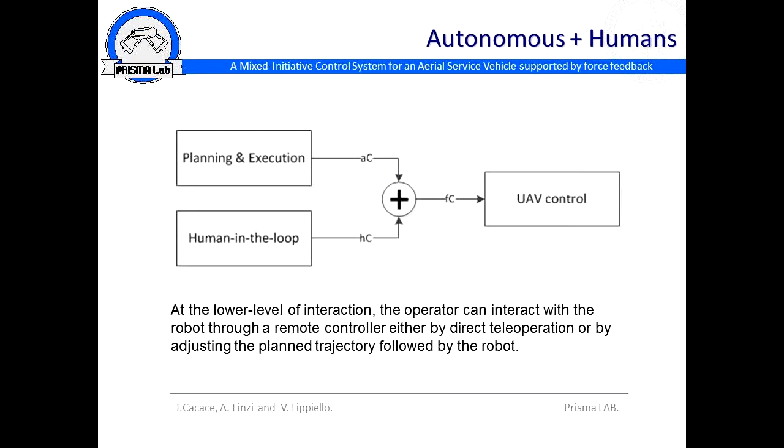The user interacts both with high-level control modules, such as task and path planning, and directly with the teleoperation module. In the first case, the user requires autonomous execution of robotic tasks. In the second, he can modify the planned trajectory during its execution.

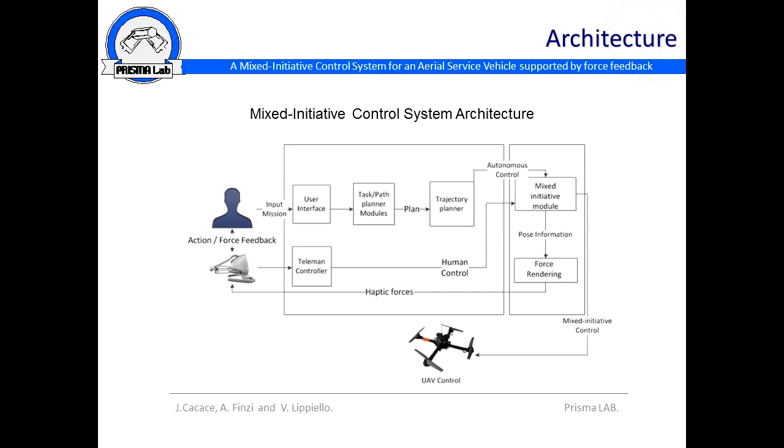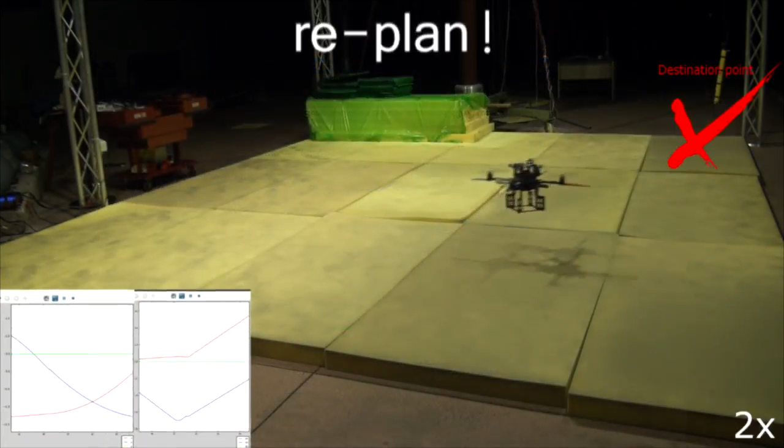With the use of the remote controller, planned trajectories can be directly modified by human interventions. The trajectory planner can be continuously invoked to adjust the current trajectory. For this reason, every trajectory is generated exploiting a fourth-order spline concatenation method that preserves continuous acceleration and allows trajectory switching without halting the robot.

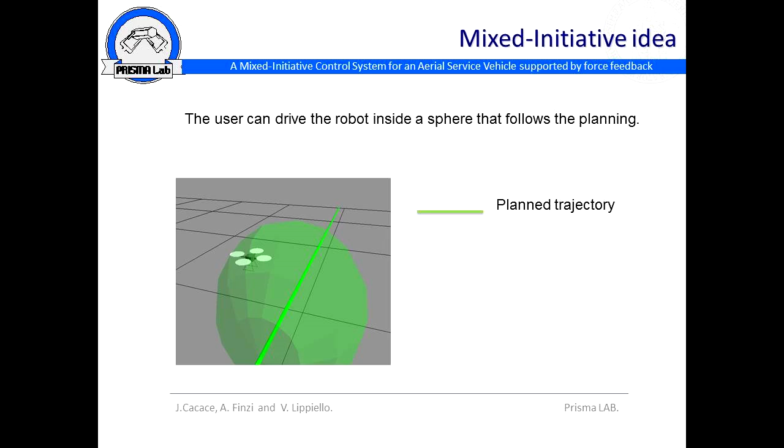The user can drive the robot inside a sphere that follows the planning, known as the teleoperation space. If the user drives the robot out of this sphere, the autonomous system generates another path and trajectory to overcome all waypoints planned in the previous planning.

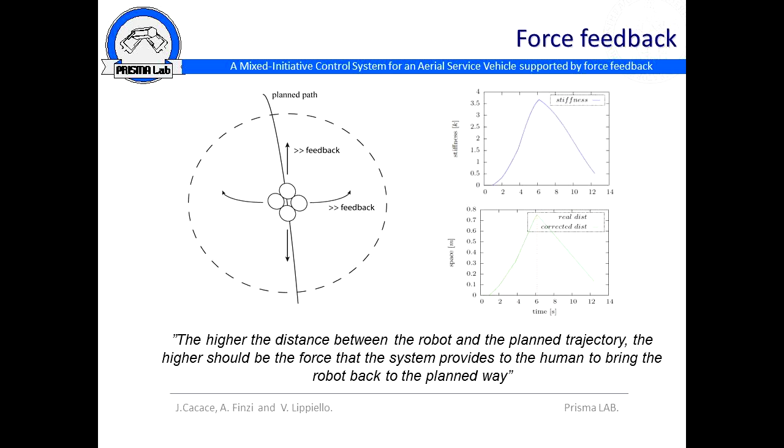The proposed control framework is supported by haptic feedback to increase the perception of how far the robot is, and in which direction, from the planned trajectory. The higher the distance between the robot and the planned trajectory, the higher should be the force that the system provides to the human to bring the robot back to the planned path.

We tested the effectiveness of the system both in virtual environment and in real scenarios. In each scenario, the user has to move from a starting position to a destination point following a planned trajectory, passing through some rewards placed along the path of the robot. The performance of the system is evaluated based on the number of rewards the user gets, and the number of times they drive the robot out of its sphere, comparing results of the system with and without force feedback support.

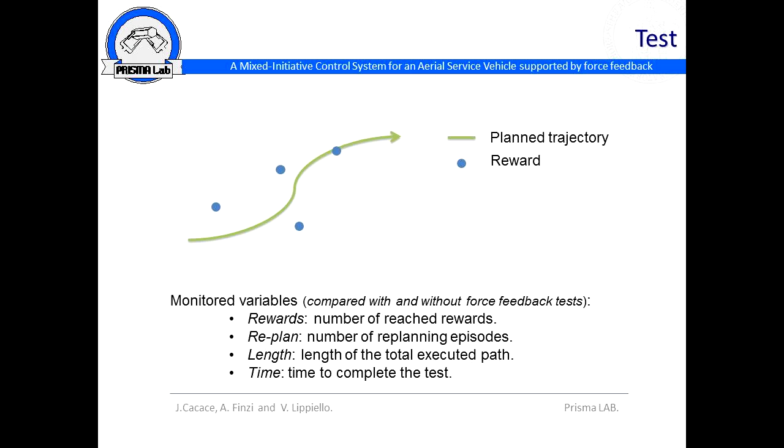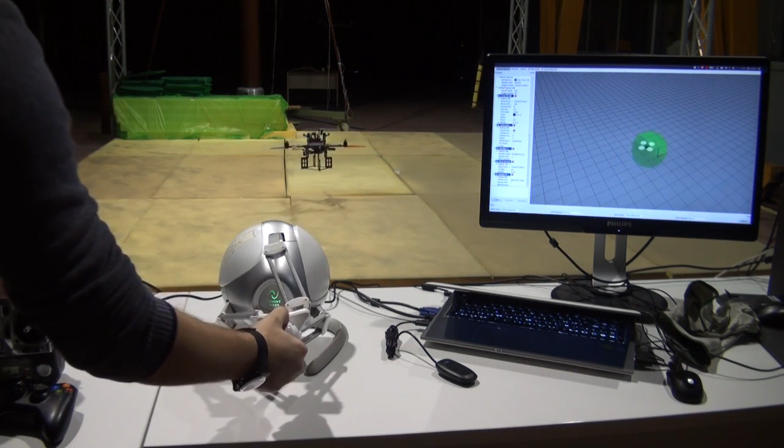This video shows a real-world test case scenario. In this context, the initial trajectory is a linear path of 3.5 meters, navigated in both directions with a movement of 7.0 meters. The user's task is to reach two virtual landmarks outside the planned trajectory.

These landmarks appear on the right screen in a virtual reality environment and become visible to the operator when the robot's distance becomes less than 1 meter.